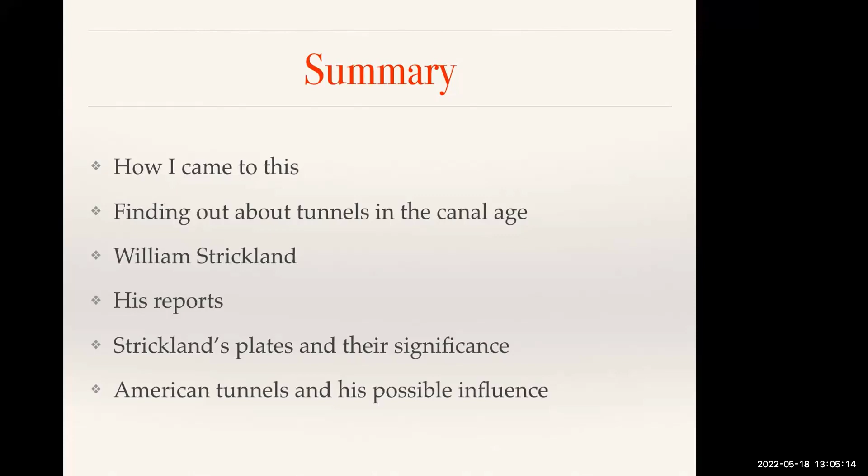So the canal age in the British Isles began around 1760, and really for the first 30 years or so, it was dominated by James Brindley, who pioneered the canal with the Bridgewater Canal, and then a number of canals across the Midlands and northern England in the 1760s. He died around 1770, but his colleagues carried on. So how would these people have found out about tunnelling? Well, in the case of Brindley and some of his assistants, they were familiar with mining practice.

In continental Europe, there were some mining schools, so you could have perhaps learned about how to drive tunnels in that way. But the main way that people must have found out, I think, at that time was by speaking to colleagues, or if you were lucky, if you had access to them, getting hold of engineers' reports. But it would have been difficult, unless you're able to visit works yourself, to find out about tunnels, because there were no published records really in the way that we'd expect today.

So when Telford began around 1794, he would have relied on speaking to people who worked in mining, finding out about geology. He worked with an engineer called William Jessop, who already had carried out work on canals and driven a number of quite long tunnels, a couple of miles in length. So basically, I discovered through my research that nothing much had been published directly on what we now consider tunnel engineering.

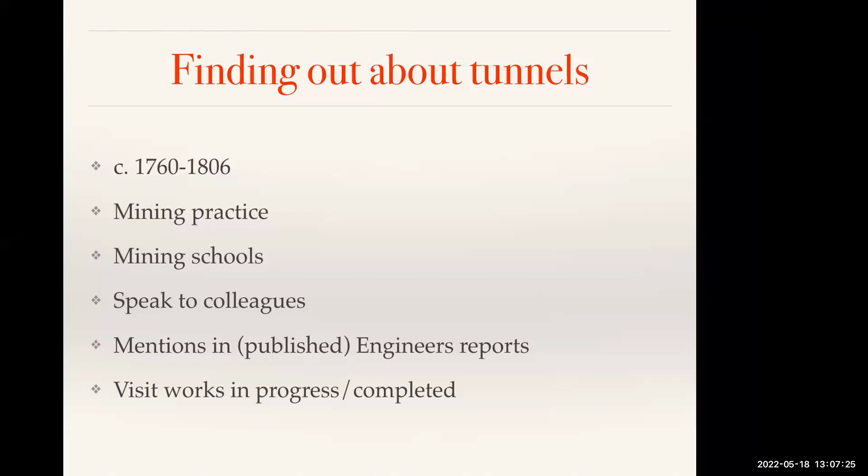And the reason I chose the date of 1806 as a break date, if you like, was in 1806, after nearly 50 years of canal construction and canal tunnel construction, an article was written by Joseph Farey in a cyclopedia which appeared in both the UK and then in the United States, which does talk about how you would go about building canals, but not illustrating how you would do it. So from 1806 onwards, you could get some advice.

There were also a number of visitors who published on British canals, but again, nothing much before 1806. Nothing much really giving any detail of construction until 1820, when some prints, which I'll show an example of, appeared. And then we have Strickland coming to the UK in 1825 and his reports being published in 1826. But it's not until the following decade that there's an English publication that gives any real detail of the engineering of canal tunnels. So Strickland anticipated this really by a decade or so. For the sake of certainly the UK audience, I'm going to say a bit about Strickland in a moment.

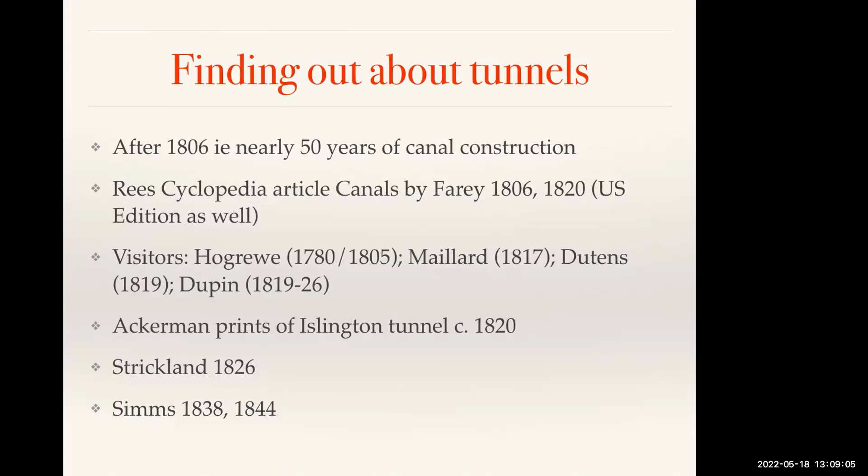And he followed Latrobe's example over the next 30 years or so, practicing both as an architect and engineer, and is really well known as an architect of the Grecian or classic revival style, which was dominant, I suppose, in North America as well as in Europe at that time, and made his reputation really with the design of the Second Bank of the United States around 1820. And that opened doors for him in a number of ways.

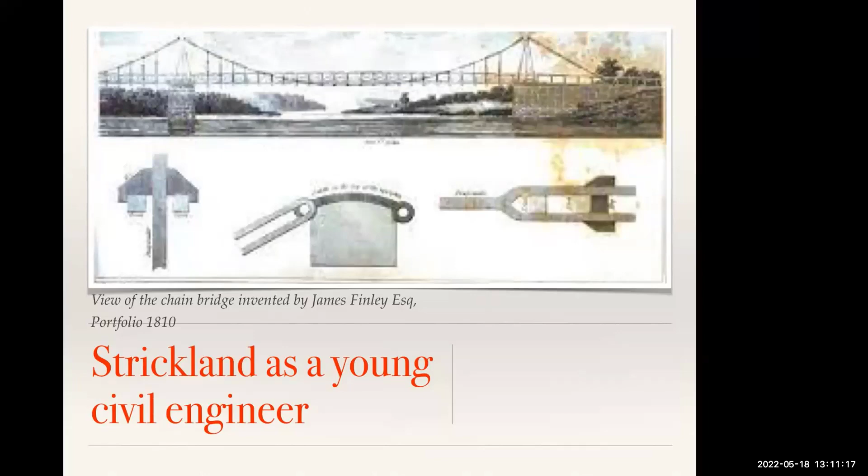And he carried out a number of works involved with canals, but interestingly, the only ASCE historic landmark I can find is the Tennessee State Capitol, which was built late in his career, which has an interesting wrought iron framed roof. To all appearances, it appears an architectural rather than engineering work from the exterior. Anyway, his architectural work around 1820 cemented his reputation in the Philadelphia area and led to his being elected to both the American Philosophical Society and the Franklin Institute.

And leading citizens of Philadelphia at that time were concerned about the loss of economic status, compared particularly with what was going on in the northeastern states and New York. And so, because of his reputation and background, he was paid for a trip to the United Kingdom to report on infrastructure by the Pennsylvania Improvement Society in 1825. And his reports, published the following year, became well known for the description and his support for railways, but it's not the only thing that those reports covered.

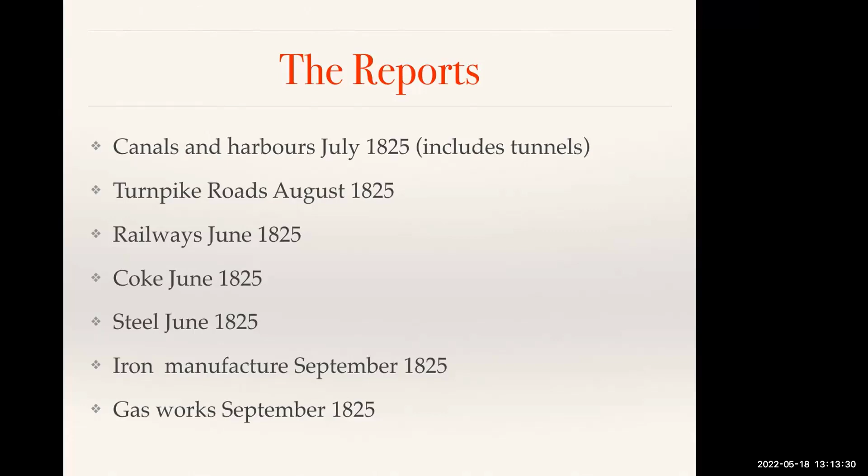They're in a number of sections, and they seem to have been made available, certainly to his supporters, as he sent them home. And the first ones really dealt with railways and the coke industry and steel in June, and that was followed by his essays on canals and harbours, then roads, then iron manufacture and gasworks. And the reports are presented in roughly chronological order, and the plates similarly in their 1826 form, but they were available to people in Philadelphia before that time, which I think becomes quite interesting.

From his own point of view, I suspect the most significant thing was the harbour works and dock works he visited, and he almost immediately became involved as engineer for the Delaware Breakwater, which apparently is the first rubble mound breakwater in the Western Hemisphere, much altered today. But he was involved with that for about 15 years under construction.

So the influence on his career is quite clear, in the sense that he went on and built that breakwater, and his recommendations on railways, report on railways are well known, but his canal suggestions, and particularly his tunnel plates, I think really have been largely ignored.

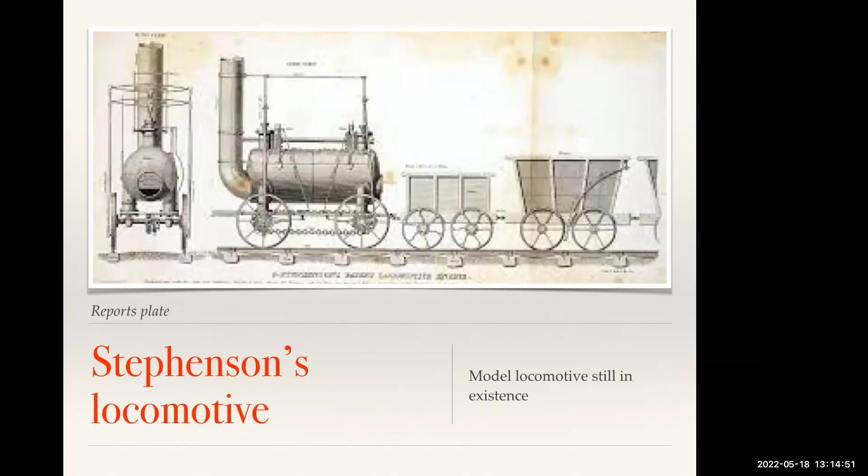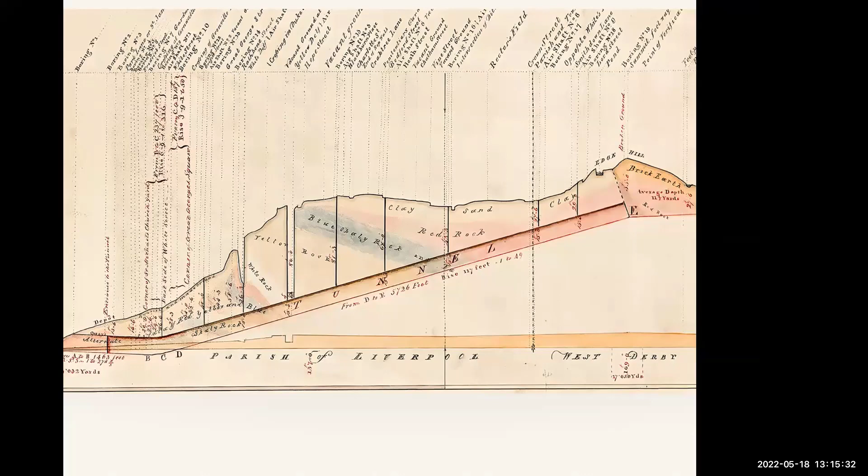So who, apart from the Philadelphia, Pennsylvania Improvement Society, subscribed to his reports? Well, there's an Appleton who may well have been a contractor, and then a number of quite well-known and lesser-known figures in engineering: Loammi Baldwin, Simeon Guilford, Jonathan Knight, Stephen Long, Dennis Mahan, Colonel Totten, Sylvester Welch, W.H. Wilson, Benjamin Wright,

and then some of the early canal companies that really were trying to get going and needed information on how works were being carried out in the UK to help them with their work. And this is one of the reasons that Strickland was sent over.

What I found quite interesting was, if you look at the early American tunnels and the engineers involved, there were a couple done before Strickland's report, but the Union Canal Tunnel, one of the engineers on that, Guilford, was one of the subscribers. Canvass White, of course, had already been over to the UK and seen canal works. Then the Pennsylvania Canal, which Strickland himself was involved with, and Wright and Welch, another subscriber, and then really the Allegheny Portage Railroad. Again, Welch was the engineer, contractor Appleton.

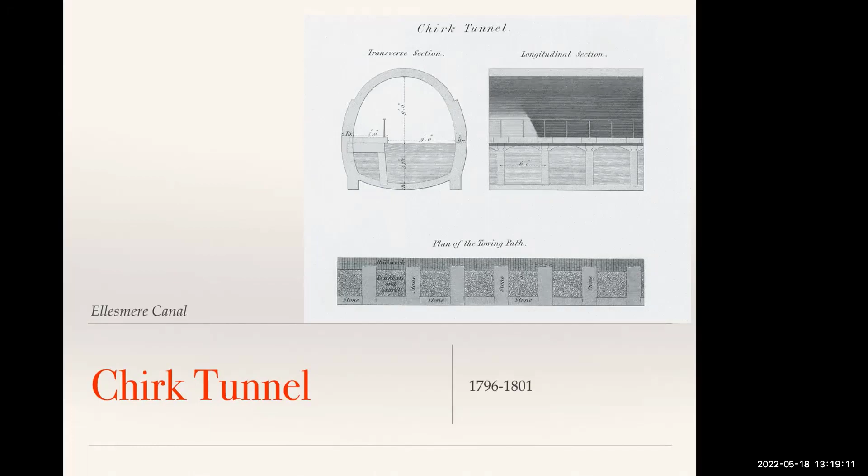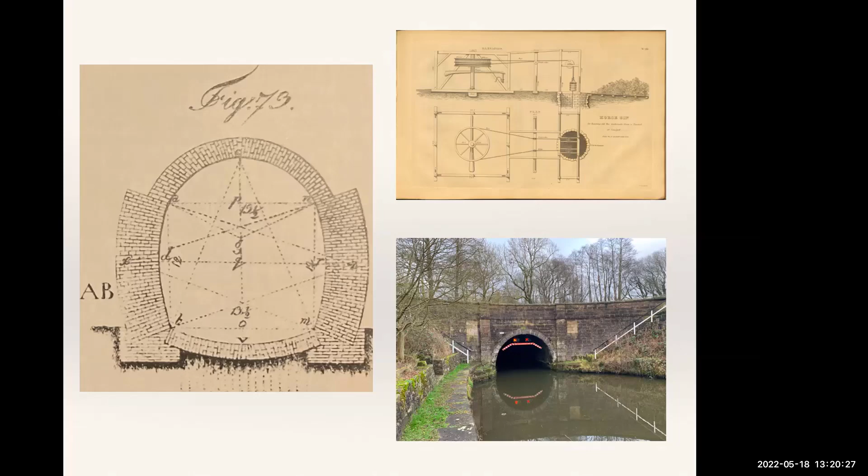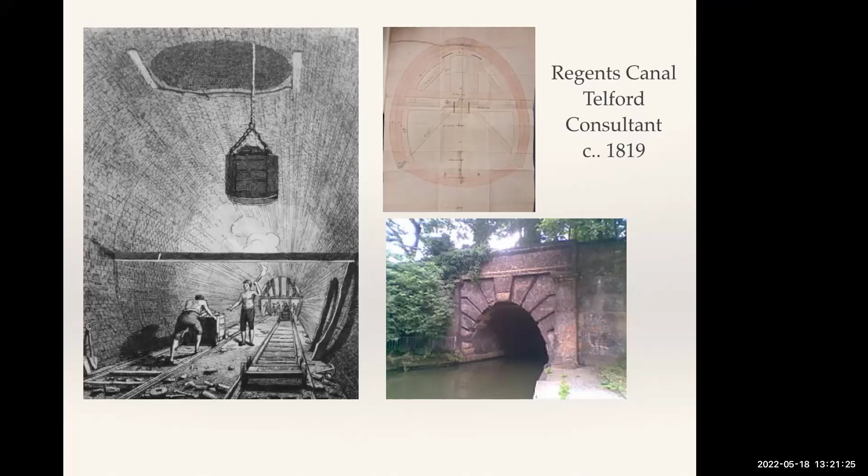And this is about 1820, the entrance to the tunnel in the photograph as it is today. And then there's a drawing from the Telford collection of the supporting formwork. And this was published about 1820 in a very sort of thumbnail way by a French observer, but nothing like the quality. You wouldn't have been able to work out how to do it from that very small drawing. Just to give you a feel of what I'm talking about there.

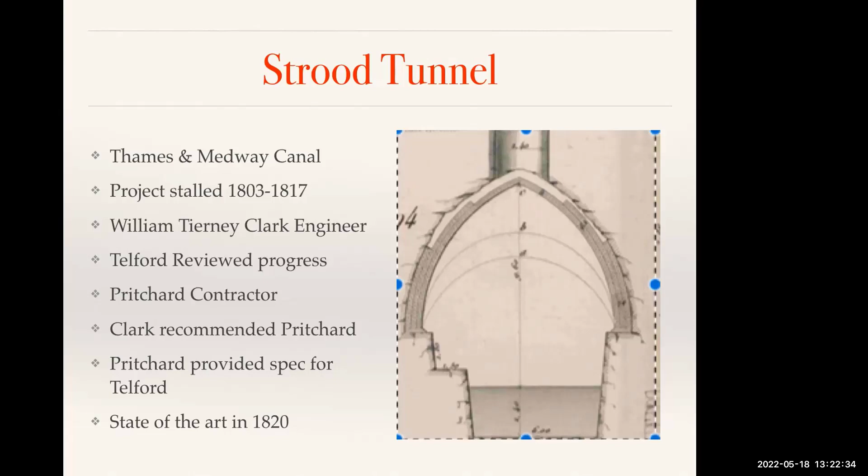It was a project that began around 1800, but they ran out of money and the engineering difficulty of the tunnel proved too much until about 1817, when William Tierney Clark was appointed engineer, and Telford initially advised the government to give it no money, but relented later. The contractor was a chap called Pritchard, who we'll come back to, who gave Telford various information. But this tunnel was pretty much the state of the art in 1820, and it's one that Strickland reported on in his reports. And these are three of the plates from Strickland's reports.

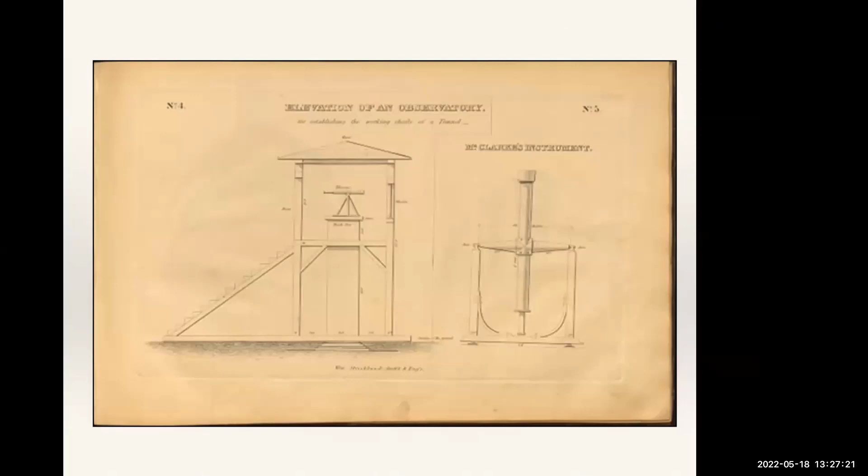And one wonders whether the reason that it was possible to produce a longitudinal section for the first time of the tunnel was because of the excellence of the survey work. They actually knew where they were in a way that hadn't been possible before this.

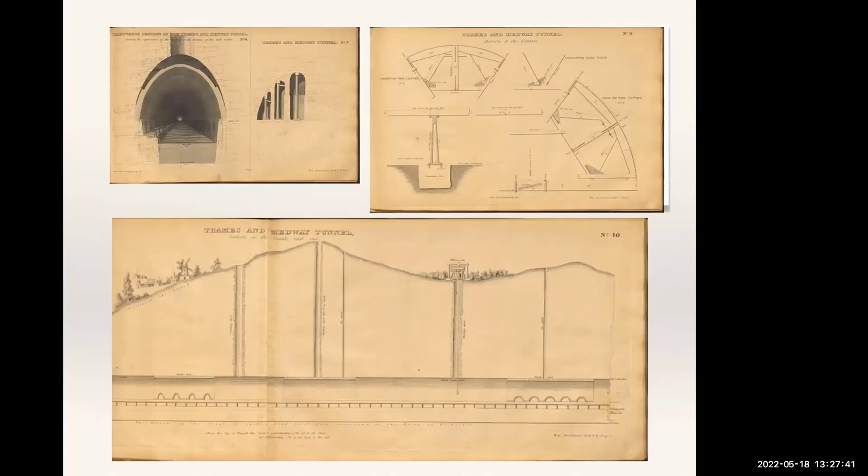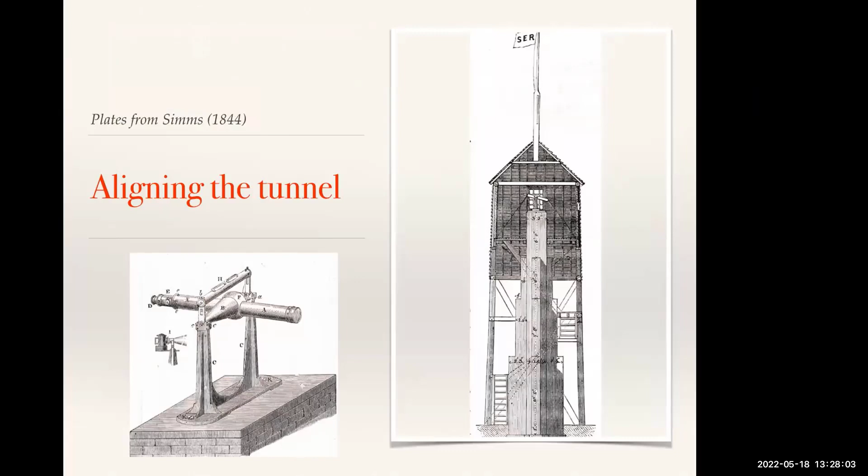And more detailed versions of these plates appeared in the first treatise on tunneling, Practical Tunnelling by Simms in 1844. This is nearly 20 years later. You couldn't have hung around to wait to work out how to do this. People must have been aware from what Strickland had done that this was the way to go forward for nearly 20 years.

The other tunnel that Strickland was able to visit and describe in some detail was the Harecastle tunnel on the Trent and Mersey Canal, which was a doubling of a tunnel that had been designed by Brindley in the late 1760s, but proved inadequate in terms of its construction and also its size as well. It didn't have a towpath. It was very slow to get through. It was one of the longest tunnels on the British Canal network.

So if one looks at this, one can see that Telford, who was the engineer, determined to line the whole thing throughout with brickwork. He used a hydraulic cement, hydraulic lime naturally occurring with hydraulic qualities, to deal with the water and make sure it wasn't washed out.

But you can see that the contractors, who again were Pritchard and Hoof, had developed a different form of centering, which in this case had sort of keys to lock the bits together as they went along, and it operated in about, I suppose, 10-foot lengths with timber sheathing resting on top of the centering or forms, and as they went along they would withdraw the last bit and put it forward and move the timber planking forward, enabling it to be built within about 3 years, and the first one had taken about 10 years.

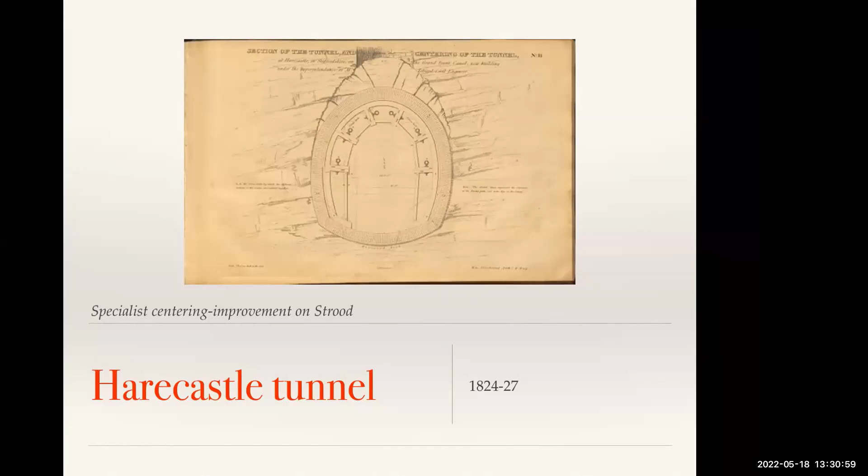And just to emphasise this point, these are another set of figures, a plate from Telford's Atlas, published in 1838, so 4 years after Telford's death, with all the detail on. There's some modification to what Strickland was able to show, but close enough to know that we're looking at the same work, and people would have been able to work out what was going on from Strickland's notes and the drawings 10 years before they could have seen the same information from this work by Telford.

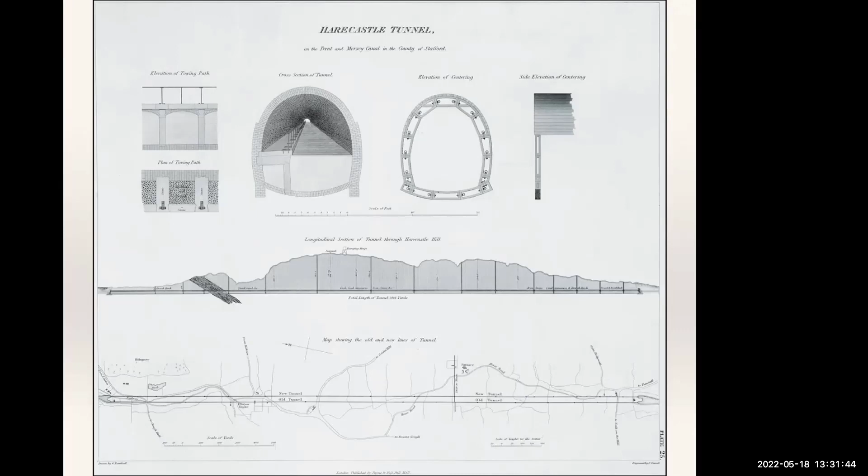And indeed, more or less the same time, 1838, Simms, published by Weale, Public Works of Great Britain, shows the first railway tunnels at that time. Weale actually reused some of Strickland's plates in this work. Clark supplied some of the Thames and Medway plates, and then Weale rehashed some of Strickland's plates in the Public Works of North America, which interestingly show no tunnels.

So for the tunnels, you have to go back to the 1820s, and I think it's a remarkable achievement, given that nobody tackled this before, that Strickland was able to do this and make them available to a North American audience as well as, one suspects, British railway engineers.

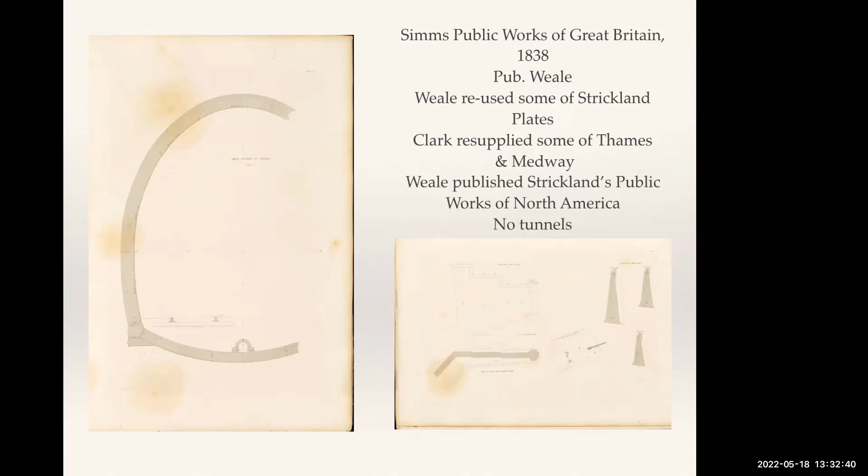And by the time the Simms Public Works comes out, this is a German language magazine, Allgemeine Bauzeitung, published 1839, showed in detail how tunnelling work was processed, so in more detail than Strickland was able to. So for 10 years, people have been a bit in the dark about all this if they wanted to see how it might be done, and had no ability to carry out personal observation.

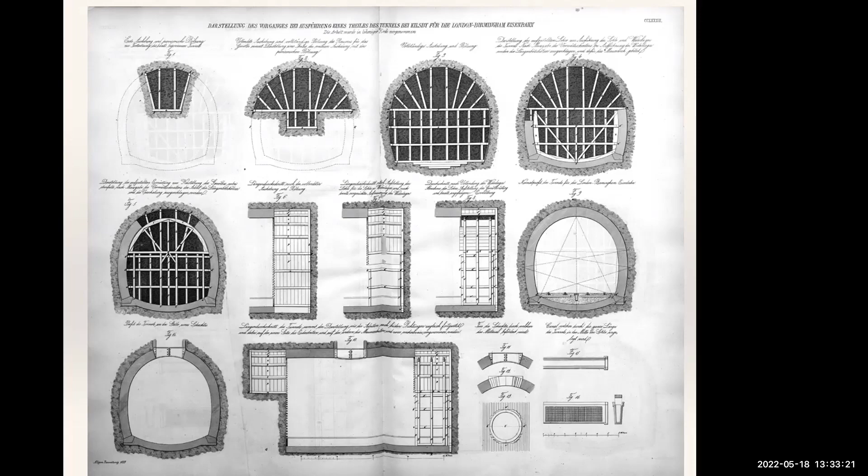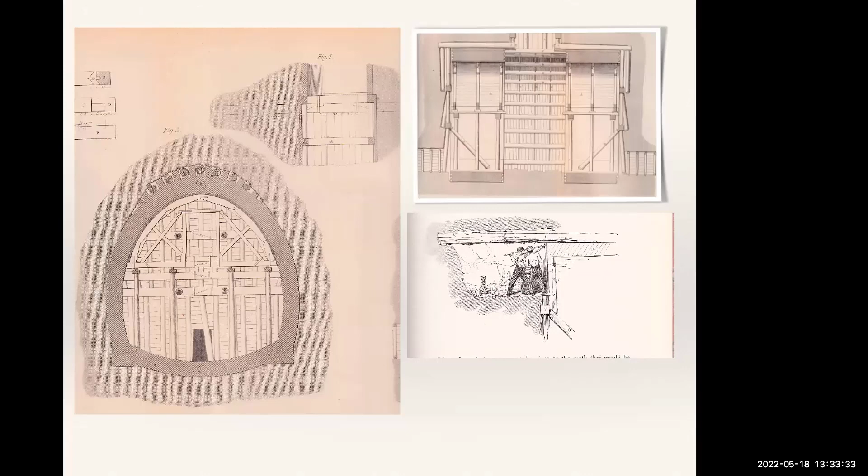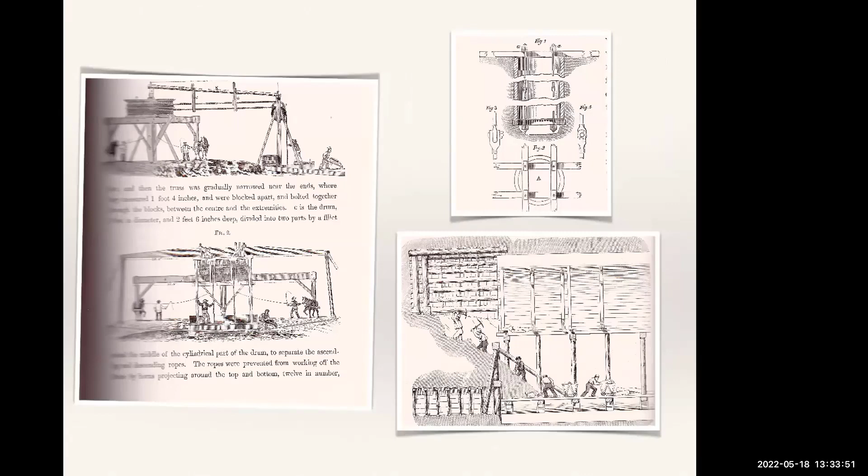And then in 1844, Simms produced another book, which is the first, as far as I know, English language textbook on tunnelling, with a great deal of detail on how tunnelling work was being progressed at that time, with the same kind of illustrations of the horse gins that Strickland had produced 20 years before. So more detail on the actual tunnelling itself, but Strickland had shown the way.

So our conclusions are basically that Strickland's reports provide the first detailed drawings of tunnel construction in English. They illustrate the state of the art in canal tunnelling in the UK in 1825. They were available to engineers before tunnel construction had begun in the USA in earnest, and by extension before railway engineers had begun to build tunnels in the 1830s in the UK. Many of the key players in the USA had copies of this, but of course many US engineers went to the UK to see for themselves, possibly prompted by Strickland's example.

But I think the whole thing does show that Strickland's canal tunnel plates remain a great source of information on early canal tunnel construction. And it's not just his research into how you built breakwaters, which is part of his study tour, or his advocacy of railroads that needs to be remembered. His work was of greater significance than perhaps people on either side of the Atlantic have realised.

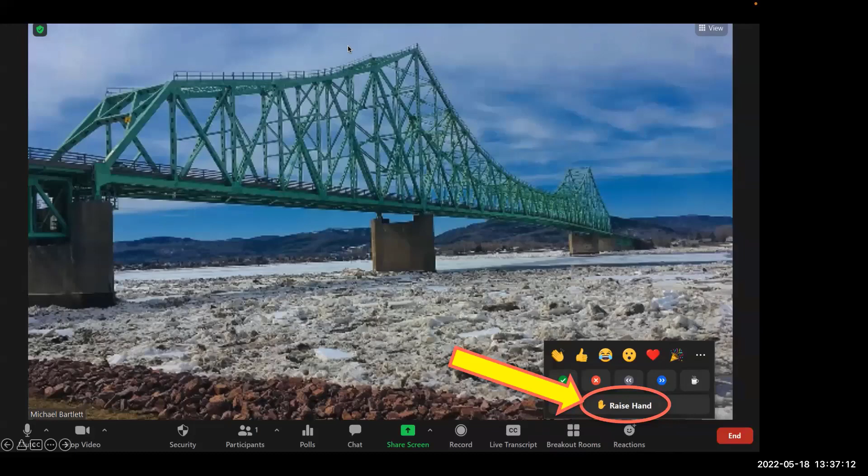That was fantastic, Mike. And I'm not surprised at all just how thorough and detailed your research has been on this. And I hope you plan to publish this piece somewhere. I'm sure you'll have opportunities to do so. And my observation really is that for any young students, who I hope might be on the call or see the video later, this must look like a different universe. In the modern age, we're accustomed to seeing pretty much real-time information bombarding us from all directions. And here you are, a couple of hundred years ago, where information could take 30, 40 years to disseminate.

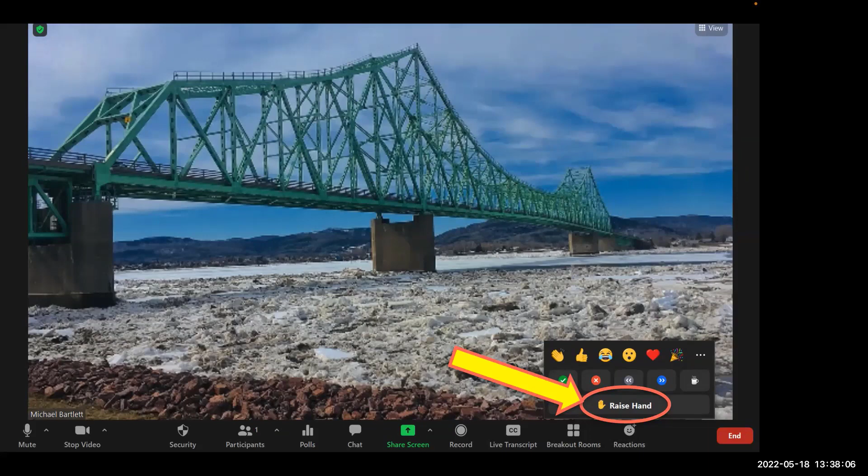Have you got a feel from the point at which the projects were happening until the general formal publication? Have you any feel for the informal sharing and networking through sketches, sketchbooks, the ephemera that'll probably be lost to us today from an archive search point of view? Was there evidence of sufficient communication prior to publication within the network of engineers on both sides of the Atlantic?

I think if you take Telford as an example, one has to assume that when he did the Chirk Tunnel, which was the first one he was asked to do as, I'm going to say, a resident engineer in a sense, he must have asked William Jessop how to do it. There were also people close by who had mines who he could have asked. And coincidentally, he was asked to do research on Roman cement for a harbour job. So he was interested in hydraulic cement. So there's a number of things coming together.

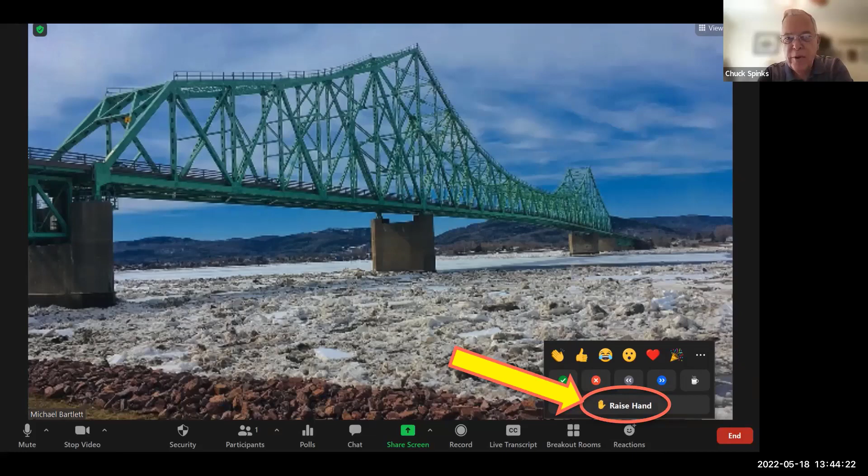Okay, another question from Dennis Broadhurst. To what extent did the early tunneling pioneers, Telford et al., perform engineering calculations for design of plates and other structural components? As you have mentioned, it is likely that most of the applications would have been based on practical experience.

The only calculations I've seen are arithmetical ones to do with likely rates of progress. So that would have been based in a sense upon the hardness of the material and past experience. But I'm sure they had no real concept of earth pressure, if you like, or rock pressure and bursting.

And that was demonstrated in the 1830s in the UK when they started to tunnel through London clay, and the lining that was originally specified was woefully inadequate for the pressure of the ground. And so they basically thickened the linings up, and I think that would have been generally the case. You got it to stand.